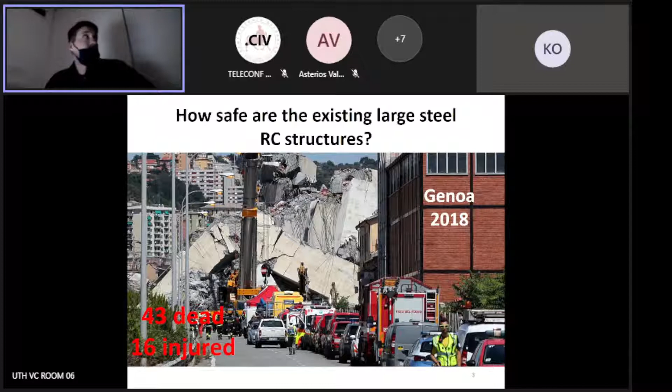So this is a message really to our generation of engineers and future generations, that this is a problem that sooner or later will start coming out, and we will see this, hopefully not with such catastrophic consequences, but this is an indication that we need to strengthen the existing reinforced concrete structures sooner or later, or build new structures using materials which have higher durability and longevity, allowing for more durable design. And this is where FRP composites come into play. What are exactly fiber reinforced polymers?

I have some samples here that I will circulate now, which actually imitate the fiber reinforced polymers, you can pass them around. You see, they are similar to reinforcement that we are using in conventional reinforced structures. They are in the form of bars, laminates, made of different fibers embedded in matrix, as well as shear links, which are used in the shearing process. You can circulate it for everyone, and show them at the camera.

And this is something for the online audience. So these are the FRP, glass FRP bars that we are using as reinforcement. Of course, this is just a small sample, a very short one. These are GFRP, glass fiber reinforced shear links that we can use as shear reinforcement. These are some different GFRP bars that can also be used as internal reinforcement. As you see, they have different structure because of different processing of the bar, which allows for better bond.

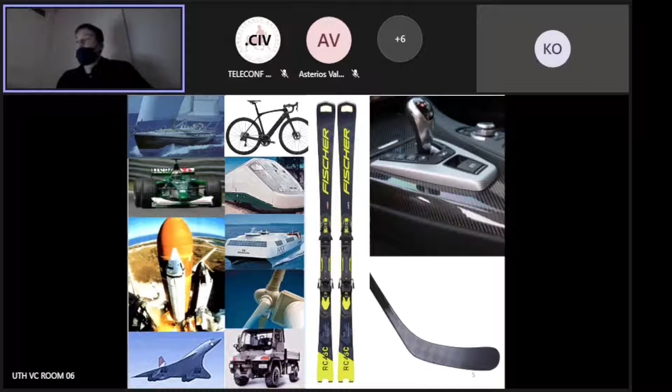This allows us to design structures more sustainably. So what are FRPs? You can see them basically every day. They're actually a legacy of the space industry, which was very active in the 60s, then moved to transport, aviation, and even sport equipment. Wherever we need lightweight, durable, flexible materials, we can use composites.

The fiber reinforced polymers, this is how they're called. Composites are made of 3 essential parts, mostly 2 with some additives optionally. They contain fibers - they can be glass, carbon, basalt, and aramid. As you see, they have different colors in the samples I showed you. Glass and aramid fibers are kind of yellowish. Basalt and carbon fibers are darker, usually black.

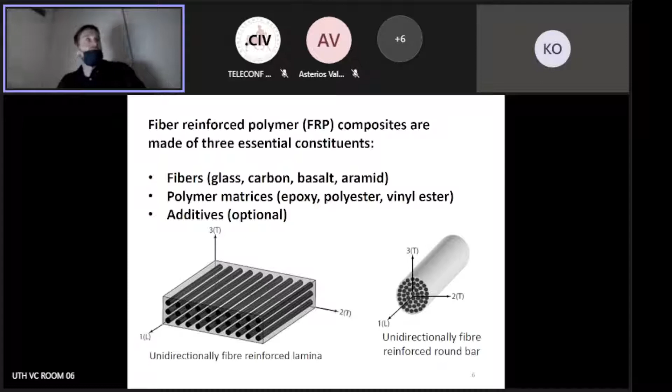The fibers are responsible for carrying the loads, where the polymer matrices are responsible for providing composite action between the fibers, as well as giving the final shape of the composite. We can also add some additives optionally, like plasticizers, bonding, and chemical agents, which allow the matrix to achieve better properties.

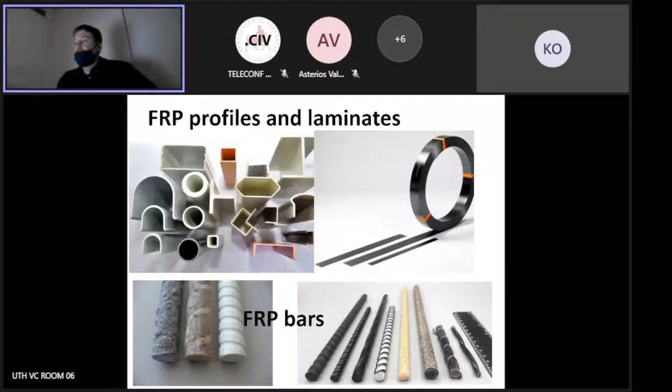As such, we can see FRP profiles in forms like hollow sections or closed sections, open sections, as well as laminates or bars if we want to use them as internal reinforcement. Here we have some possible uses of laminates - as you see on the top photo, we can glue the laminates directly to the concrete surface and strengthen deteriorated reinforced concrete structures. But we can also use it as internal FRP reinforcement and make structures fully reinforced with FRP composites, which highly increases the durability of the structures.

Now, the size of the photos is also intentional. Right now, the biggest application of composites is in strengthening existing structures. The market for new structures fully reinforced with internal reinforcement is growing, but it's still smaller than the market for strengthening. One reason is that we really don't understand how to design safely large FRP reinforced concrete structures. We've adopted some provisions from steel codes, but researchers and practitioners are still a little hesitant.

But this market grows - I recently had a meeting in one of the technical committees of FIB, which deals with FRPs in the field of strengthening as well as internal reinforcement. Some experts from the United States clearly indicated that the market for internal reinforcement is increasing now. Even recently, for every 10 projects with FRPs, 7 or 8 out of 10 was actually with internal reinforcement. So we can see this market is growing, and it can even grow more in the next decades.

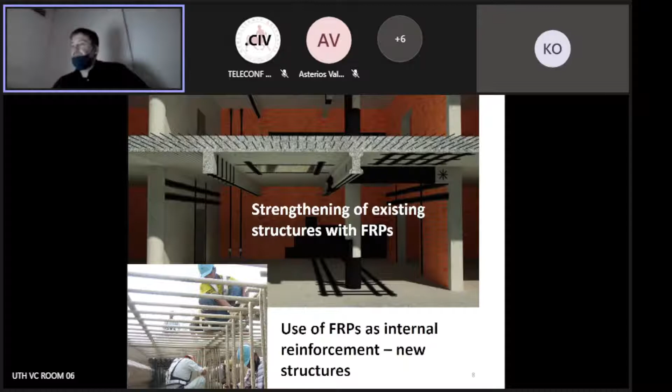So these are some typical properties for FRP composites. As you see, we have different fiber types, and different properties can be observed. The variability in tensile strength and Young's modulus is quite high. We can get something from 2,700 MPa in terms of tensile strength up to even 4,000. So if you remember how much structural steel can take, you can see that you can achieve tensile strength even up to 7-8 times that of structural steel.

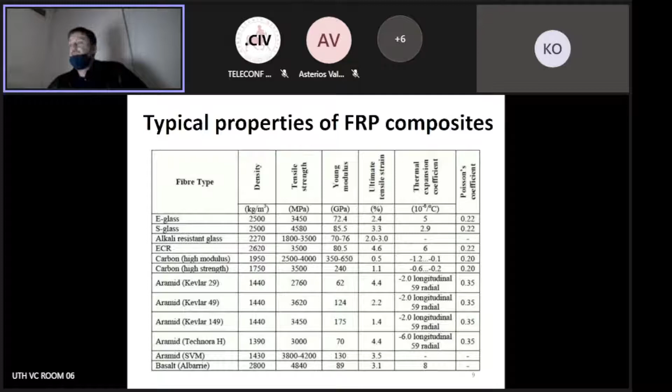The same with modulus - we can go much higher even with the modulus, although this is only for some limited applications using carbon fibers, which are very expensive. Right now it doesn't really make sense to use such expensive materials, so we rather focus on the use of glass and basalt fibers, which are quite a good deal in terms of stiffness of the reinforcement to price.

So what's the difference between steel reinforced concrete and FRP reinforced concrete? The main difference is that the stress-strain behavior of the fibers is linear up to failure. So we don't have this nice yielding plateau that we can observe in steel reinforced concrete structures, which, as you will see later, is kind of complicated because we need to find a limitation for that reinforcement which will allow us to safely design such reinforced structures.

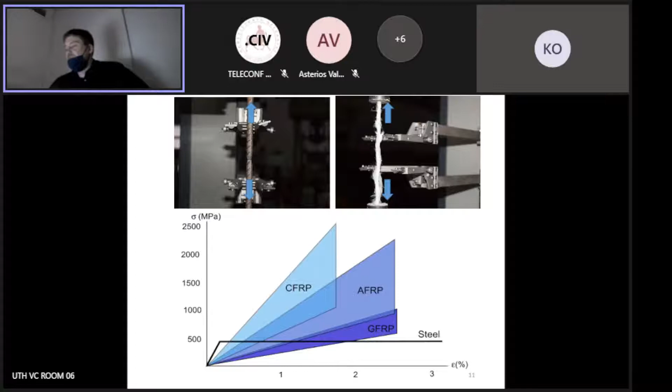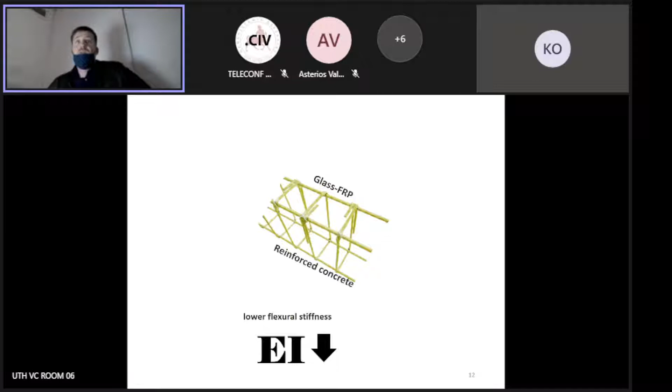So if we take a fully reinforced glass FRP reinforced concrete beam, what are the differences? Basically, because glass fiber reinforced FRPs have lower flexural stiffness of the bars, we will observe lower flexural stiffness, larger strains, larger deflections in the beams, wider crack openings, as well as less concrete will be engaged in compression. So actually, you will see that all these mechanisms which contribute to shear in concrete are kind of smaller.

The contribution is smaller. And also because the fibers are only placed in one direction, the transverse stiffness of the bars will be much lower.

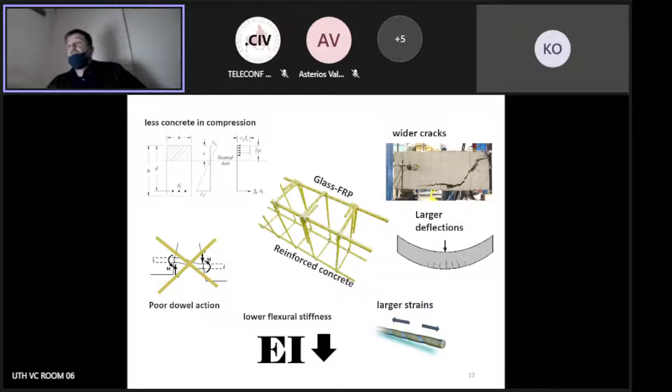So we see that this would result in a situation like this. If we test two identical beams, identical geometry, with the same amount of reinforcement—one steel, one glass reinforcement—because glass has a lower modulus, we will see that the FRP reinforced concrete beam will be more deformed, more cracked, will exhibit more brittle behavior, and lower load capacity.

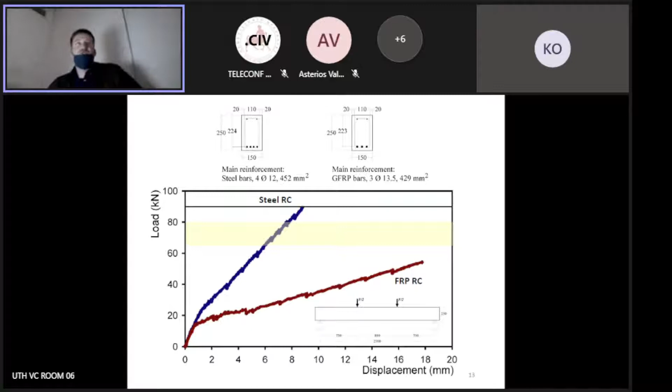So now you might ask, what's so special about FRPs if they yield smaller capacity than regular steel? Well, as I said, I'm not trying to convince you that this is cutting-edge technology and we should stop using steel and start using FRPs. I'm not any sort of FRP crusader going around selling FRPs.

I'm just telling you that this is something for something—a choice that we make to construct new structures with materials that can live longer because of the non-corrosive behavior of this reinforcement. This reinforcement does not corrode, so we can technically design structures for much longer than we would with steel. The pros of FRPs are, as you saw, high tensile strength, high deformability, non-corrosive characteristics.

As well it is a lightweight material, so it's easy to ship to the construction site as well as handle on site, which provides an opportunity to cut some costs.

However, usually because of the price of FRPs—carbon fiber reinforced polymers—we are forced to use lower stiffness bars. So we actually end up stacking more FRP reinforcement in the sections to achieve the same capacity. Another issue is poor transverse stiffness, which limits us to using FRPs only in one direction, and they have poor performance as dowels, whereas steel performs well in any direction because it's an isotropic material.

The most important thing for me is that it has no yielding plateau, which really changes the whole concept of design. Although for now we are still using the same design concept as for steel, I will show you a bit more later, and you will realize there is scope for some improvements there as well.

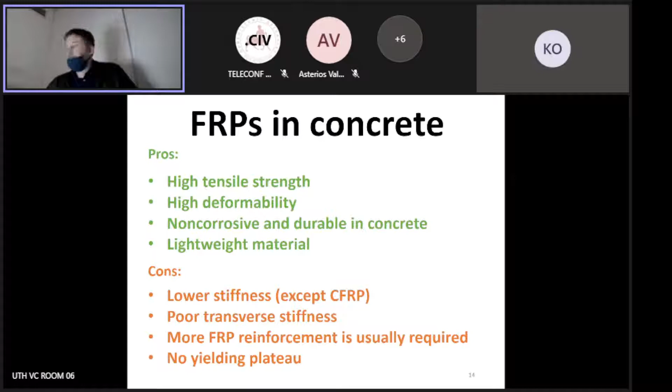So let's move to design philosophy for shear. I will start with this video just to show you how brutal shear can be.

I'm sure most are familiar with how structures fail prior to flexure failure if under-designed for shear. This is one of the beams that I tested in Sheffield. It has a depth of around 400 millimeters, with no shear reinforcement at all—only some reinforcement here just to make sure it fails here. So, as you see, this is some kind of failure that you really don't want to see at any ultimate limit state, because it is just catastrophic.

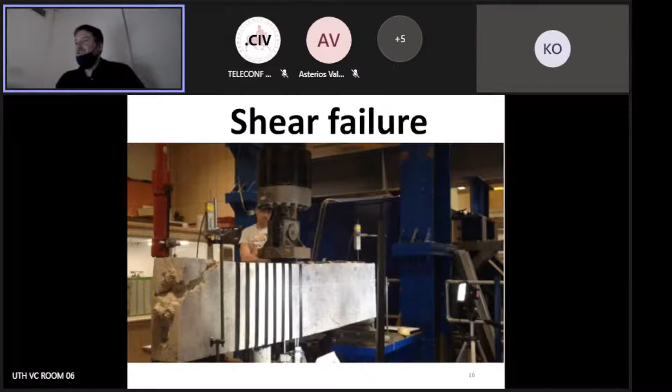So what do we really do in steel reinforced concrete? If you know Eurocode a little bit, you know it is so scared of shear, or wants to be so conservative, that it doesn't even take into account the contribution of concrete. Although the overall shear resistance comes from the contribution of concrete and the contribution of shear reinforcement, in Eurocode, once shear reinforcement is provided, we don't even care about the concrete anymore—we just make it a very conservative design.

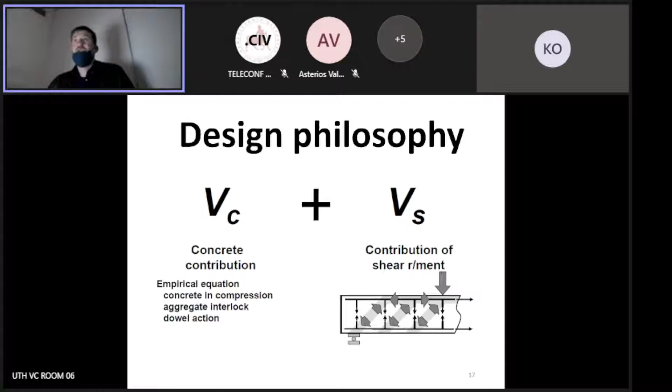Because, as you saw, all these mechanisms in FRP reinforced elements are deteriorated—FRPs are more brittle, and these mechanisms have smaller significance in terms of overall shear strength—we are not allowed to be so conservative in FRP design. We need to take into account both VC and VS, because otherwise we would end up with a very small contribution, and it would not make sense to use these materials.

So how do we deal with this? What do we do when we design FRP reinforced concrete elements? This question arose at the beginning of the 90s when we started looking at this. Really, the most reasonable way was to limit the strains in the FRP reinforcements—both longitudinal and shear reinforcement—to the same limits we use for steel.

As you know, steel yields at around 0.2 to 0.25%. So the first idea was to assume we are forcing our beam to the same strain, and then the same mechanisms should be mobilized. After a while, we realized we could push it a bit farther and still nothing bad happens, so we can even go to 0.45%, and it was claimed that this is a safe design, and nothing can go wrong with this.

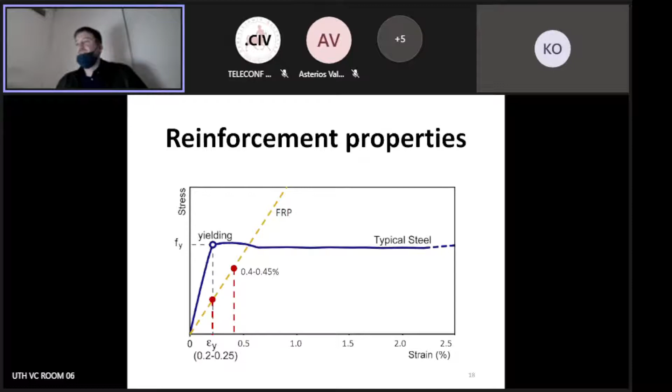And this is to some extent true, but I will show you what I found in my research, that actually this is not really a conservative approach, and in some cases for larger elements we can have some issues with this.

So what we do really is the strain approach. We say that strain in FRPs is the same as strain in steel, and the forces to be developed are also the same. So as such, we end up with the equivalent area of the reinforcement that we need to provide.

If you remember the Eurocode equation for calculation of contribution of VC, it looks like this. We basically calculate a new area of the reinforcement, and this is how we really account for contribution of concrete in FRP reinforced concrete elements.

There's a kind of very simplified approach that is directly adopted from the Eurocode. This is the Eurocode modification, by the way. Every country, every different continent has their own codes, and they also put their own modifications. We're not gonna go that deep here, we'll just focus on Eurocode because we are all familiar with this code.

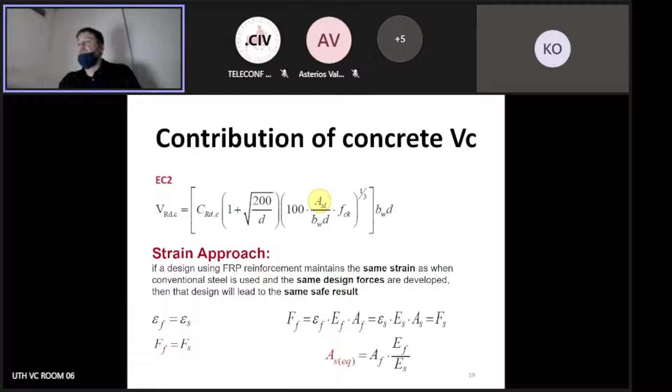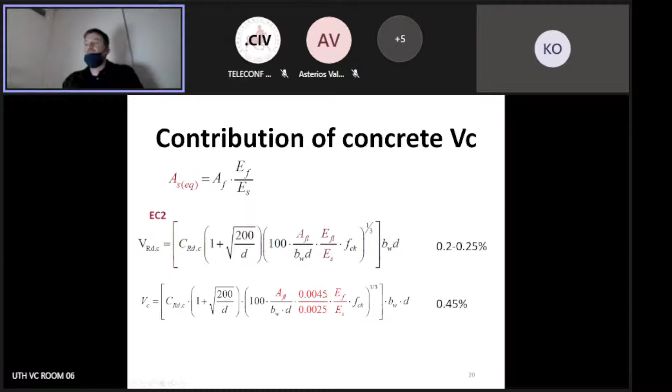And this is another analytical explanation of how they deal with this. If we want to increase the contribution up to 0.45%, then of course we need to apply a factor which will account for that. So this is for VC.

How do we deal with VF, which is the contribution of the shear reinforcement? Well, since we are operating with stresses here, it's pretty easy. We can just put those limits that we are interested in directly into the equation for truss analogy, and we can basically calculate the contribution of the shear reinforcement in this way.

As for now, I don't know, maybe it has changed in the last few years, but 4 years ago, the limit for the contribution of the shear links, these shear links that I circulated with you in the design, was from 0.25% to 0.5%. This is the maximum that we can do, depending. Canadians are less conservative and allow for higher utilization. Japanese code, if I remember correctly, and British code were more conservative.

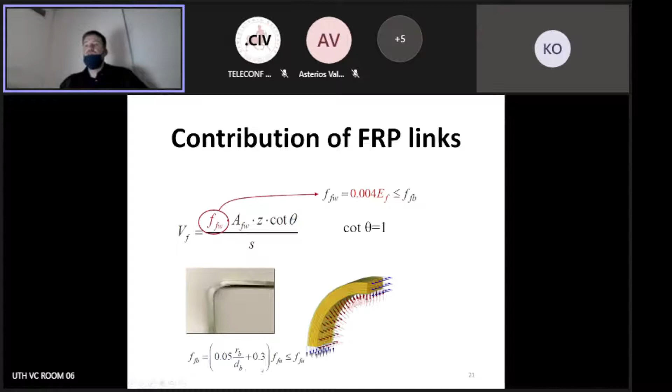Of course, we have to remember there is one issue with the FRP shear links. As I said, the transverse stiffness is much lower than the longitudinal stiffness along the fibers, so there is a risk of premature failure in the corners adjacent to the longitudinal reinforcement. We need to account for that and reduce the stress to an allowable stress in the shear links using this equation.

So what else is important in shear? This is something that I was studying, and it's really quite a complicated topic. It has been identified since the 60s already, but I believe this is one of the reasons why we still hesitate with using FRP reinforcement for large reinforced concrete structures, because we really don't understand how this really works.

Size effect in shear in reinforced concrete - what does it mean? It means that somebody observed a long time ago that if we design and test a few identical beams where the only variable parameter is effective depth, we actually will observe lower shear strength at failure in the larger elements. This is more pronounced for elements with a/d around 2.5, so shear critical. Once the element becomes more slender and resists loads more through bending than shear, this effect is less significant.

This is a problem, because if we use the same equation without this reduction factor, we will end up predicting a continuous, the same shear stress level across the span of depth, and this will end up with large reinforced concrete members being grossly under-designed, which can cause a failure of the structure. Actually, there was one shear failure of a warehouse - I don't remember exactly when, but it was related to size effect. Since then, we started looking into this in more detail.

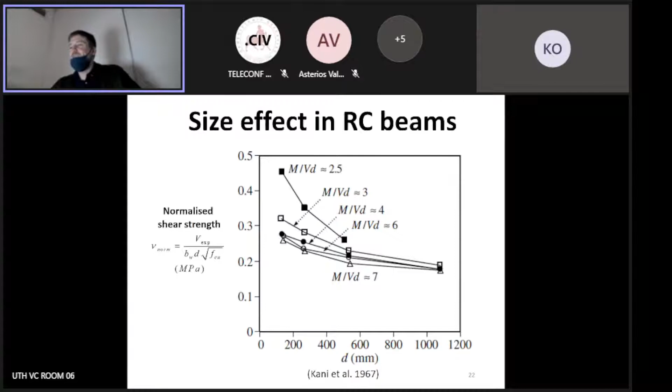We just apply some reduction factors, which tell you how little we really know about the size effect. Every code has different factors that are all over the place - some give bigger reduction in shear strength, some give smaller reduction.

These are all the reduction factors applied in FRP codes for internal reinforcement, but they're really directly applied from steel reinforced concrete design codes, which I don't think is correct, and I think many people have started thinking this is something that could be improved.

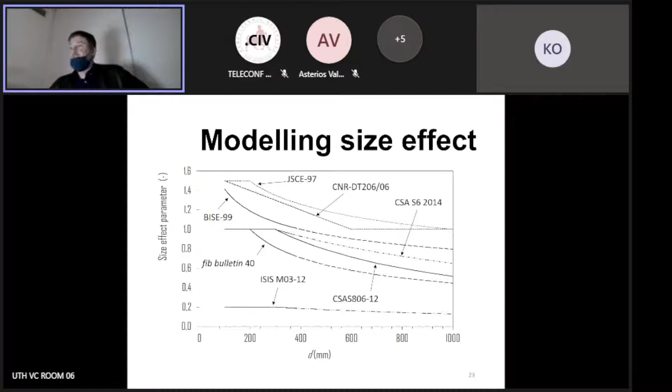So in my research, I was really looking into these two topics: one was size effect in FRP reinforced concrete elements, and the second was the relative contributions of Vc and Vf - contribution of concrete and shear reinforcement to the overall strength of the beams.

We have a collection of two large data sets of probably all beams that have ever been tested in shear. There is a famous database by Reineck et al., and they really collected everything that has been done since the 70s - a huge paper which many researchers work on.

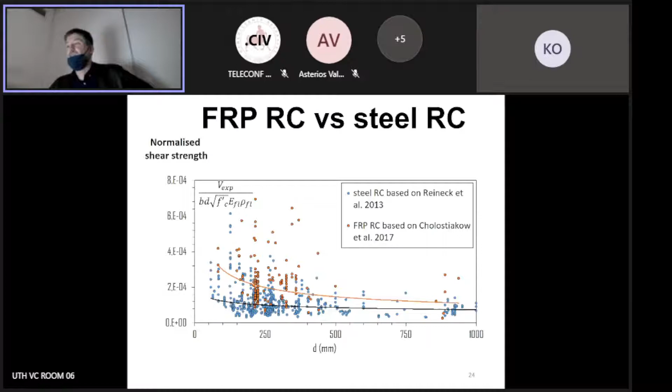When I compared this to my database that I collected for FRP reinforced concrete elements, which is of course much smaller, I started seeing indications that it makes sense to argue these reduction factors directly adapted from reinforced concrete design codes might not be correct, because it looks more pronounced.

When I checked the performance of some code equations for FRP reinforced concrete elements and plotted experimental results against predictions, in an ideal world we wanted to see them along this line where we see 1. Of course shear has a lot of variability, so we really don't see that here.

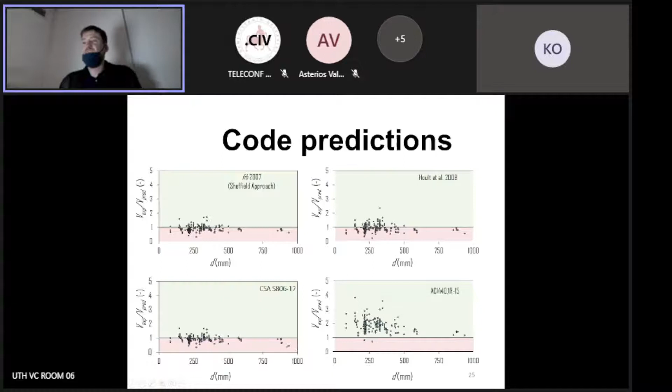So I designed and carried out a series of tests on beams, looking at different sizes of the elements, with beams with and without shear reinforcement. I was focusing really on size effect and on the contribution of the FRP reinforcement.

We were lucky to be able to use digital image correlation for this - it's a measuring tool which allows you to obtain full field information on every surface you are investigating, so we can really measure the displacement of any point on the beam.

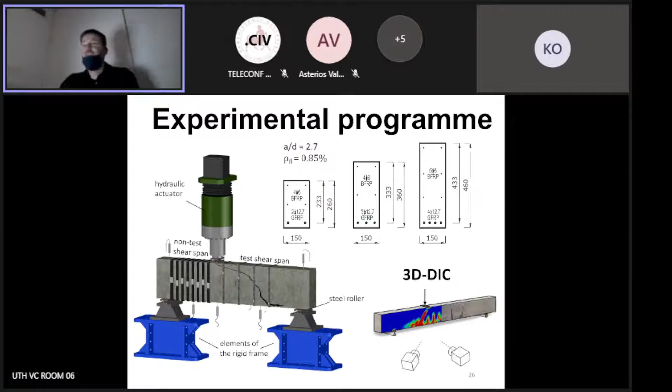Now, of course, I was dealing with internal reinforcement, which you cannot observe with DIC because internal reinforcement is by definition inside. So we had to do a little trick and use externally bonded, fully wrapped FRP links, which one might argue are not really internal reinforcement. But if you know shear, the performance of this type of reinforcement is strength dependent, not bond dependent, and they essentially work similar to internal reinforcement.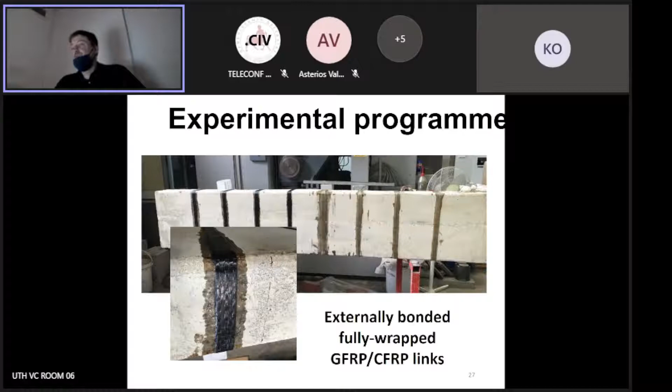So we adapted this way, and what we could do is get better insights into the strain and utilization of the links. As you see, these dark spots are also strain gauges that I put, but the problem with strain gauges is that they give very local information about the utilization of the material they're put on - if the crack goes a little bit up, they might show you nothing.

So anyways, we had both strain gauges and DIC, and we were monitoring the utilization of the links this way. I want to show you this.

This is a test on an FRP glass reinforced beam. Actually, Lambros, I think you were there in Sheffield when we were testing - I think so. So we see it pattern failing, one by one link fails, and you can see that it's quite brittle.

What I was doing was repairing one side and testing the other span of the beam, which can really provide you two specimens from one if you do it properly. And actually, I got quite good results from this.

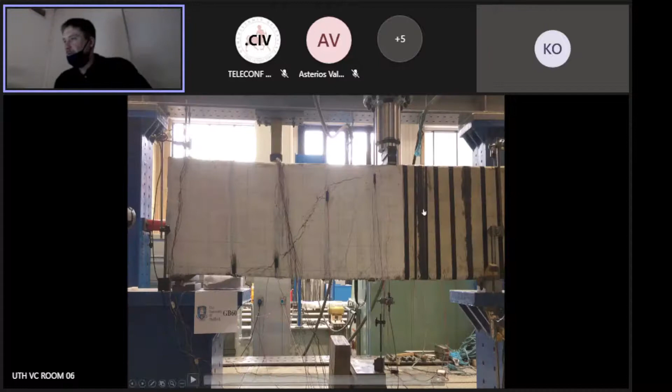There was another video to show you - this one is carbon stirrups. These carbon stirrups are stronger, let's say that, so we can expect a larger break.

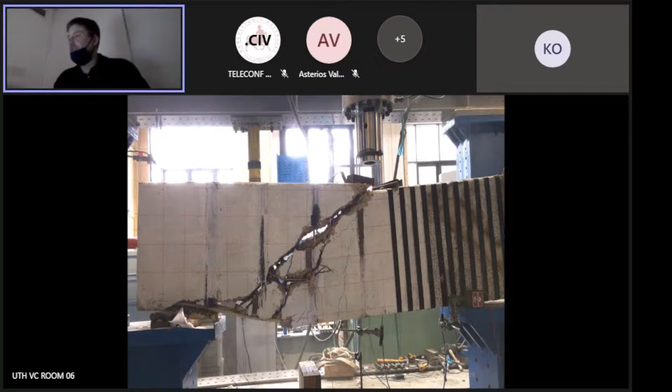So you cannot say that FRP reinforced concrete structures are not brittle after these videos, I suppose. These are some cracking patterns from the tests, but what was very interesting...

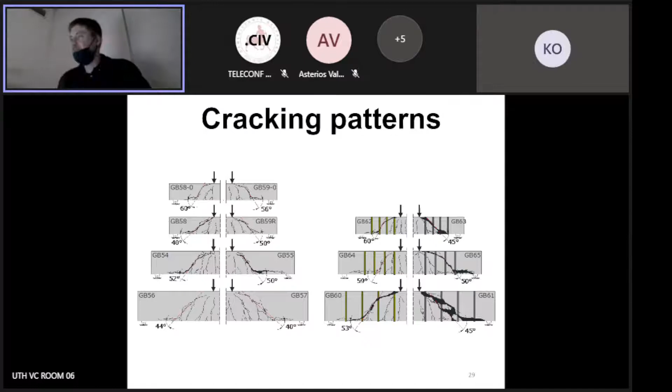What we observed is that the initiation of the shear crack always starts from the tip of the flexure crack, then goes up to the compression zone, and when it cannot go further, it goes backwards and propagates along the horizontal reinforcement.

What I found is that this initiation point is actually a function of the overall or effective depth of the element. The taller the element, the lower this initiation point was placed, which really affected the inclination of that shear crack.

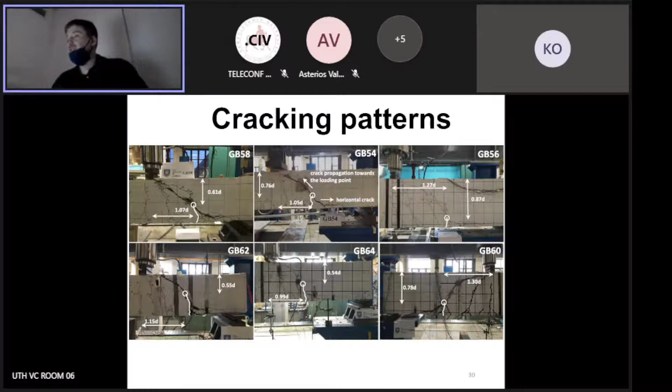And these are some test results, from the longitudinal reinforcement strain. And this is the first indication that I realized that something is not really according to the literature that I was studying.

I said before that up to 0.45%, or 4,500 microstrains, nothing should happen to the beams. But the tallest beams, which are not really frequently tested in labs, showed that you can get a little bit below that 4,500.

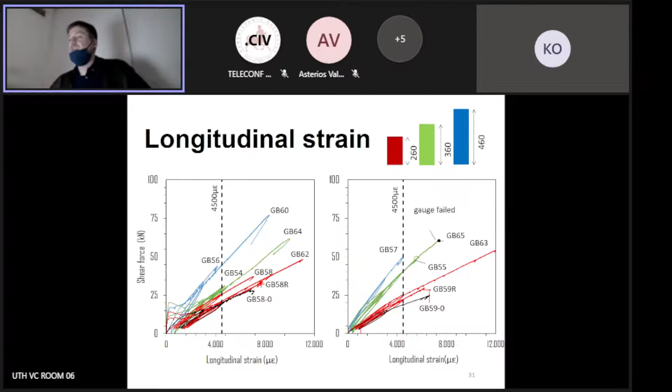And if you test even larger elements, what I found out later, you can get even lower strains. So that already gave me an indication that there is something not consistent with the current state of the art at that time I was studying.

If you provide shear reinforcement, according to the literature, you should not see size effect because it's effectively mitigated. And I saw that too.

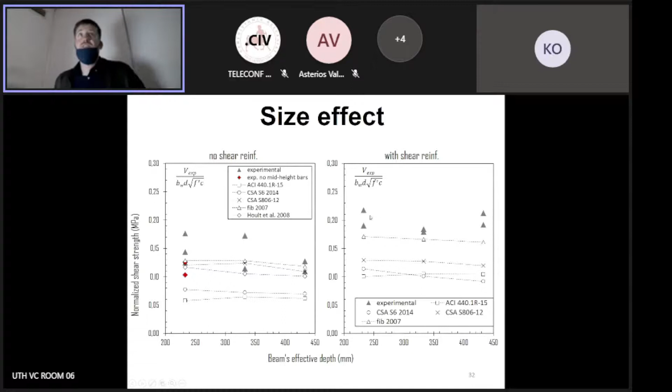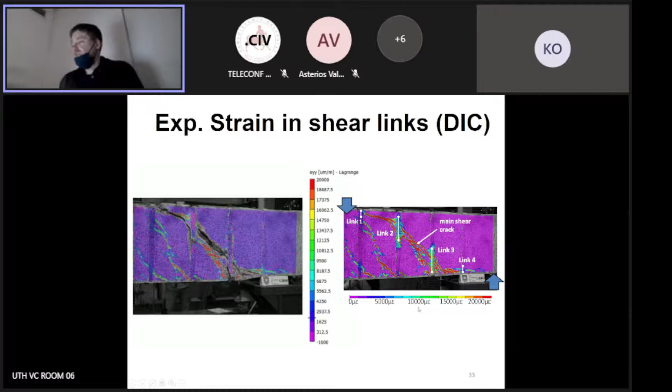Then I calculated the shear force produced in every one of the links and subtracted it from the total. So at the end, I had the contribution of the shear reinforcement, and everything else was the contribution of the concrete.

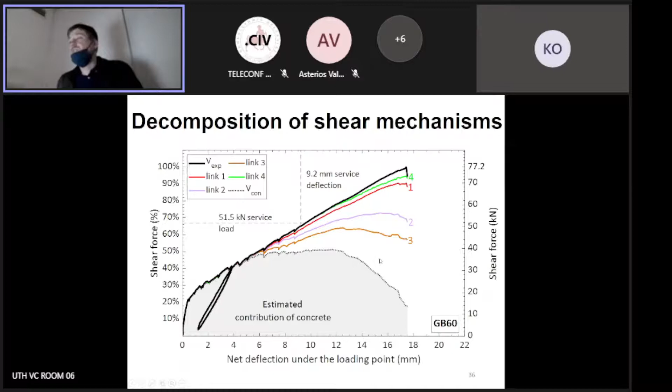So although size effects should not really exist in elements with shear reinforcement, you can see that size-related phenomena are clearly present here, which was very interesting.

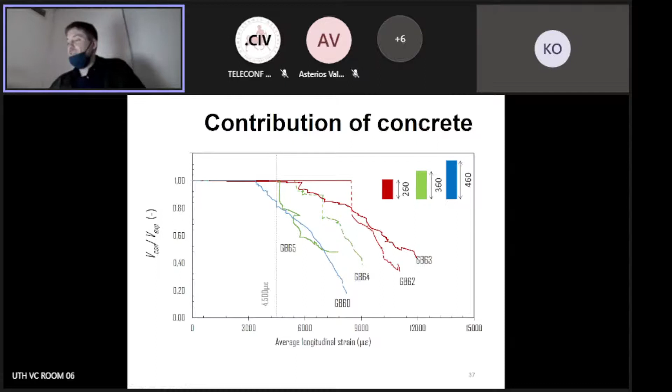So here we have a set of data where the red triangles are my data from my PhD. I dug a little deeper and also found other research studies testing larger elements, then excluded all the elements which were too slender or too much like corbels.

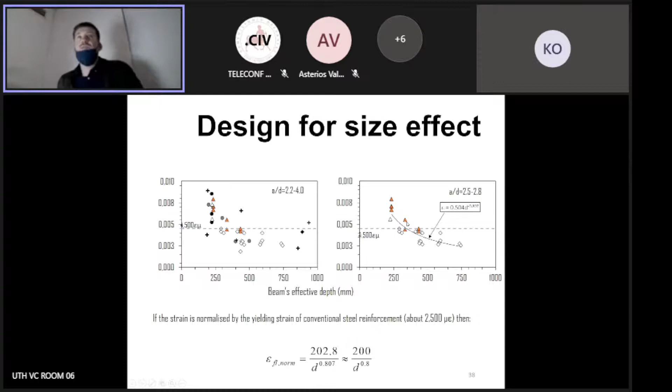I really saw a quite clear trend that the maximum strain in the longitudinal reinforcement should not be a fixed value, but is really a function of the effective depth of the beam. When I worked on it a little more, it showed that it can be easily applied as an additional reduction factor to the already existing reduction factor for steel reinforcement.

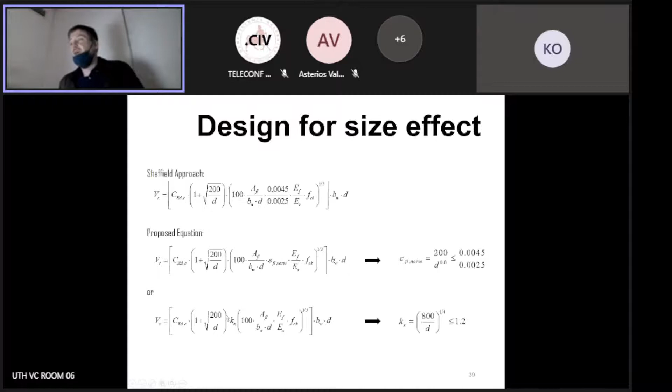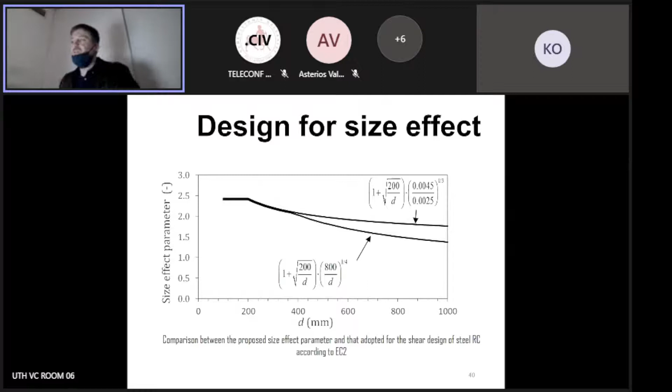This can help fix those problems I showed you at the beginning. Basically, the one on top was already in the literature, placed in FIB Bulletin 40 as a provision for VC, the contribution of concrete. I made it a little more pronounced to get these data points shifted up a bit, and applying that provision really helped give those predictions more accurately.

Now you might say, okay, all this work for only shifting up a few data points. Yeah, that's maybe true, but we don't have that much data. It's not easy to go to the lab and test a beam that's 800 millimeters in size. It's a lot of work.

But the most interesting thing I found in my research is that I used the same equation for a steel reinforced database. What I observed, for some reason, is that it can be directly applied to these steel reinforced concrete structures, and as you can see, it can reduce the coefficient of variation by up to 25%.

This is a huge improvement over the existing code, because if this is the performance of the existing Eurocode equation, it should make the data points align along the line—it clearly doesn't. You can see the same size effect I showed at the beginning of this presentation. If you use the equations we developed at the University of Sheffield, you can bring this down and make the design more economic and robust.

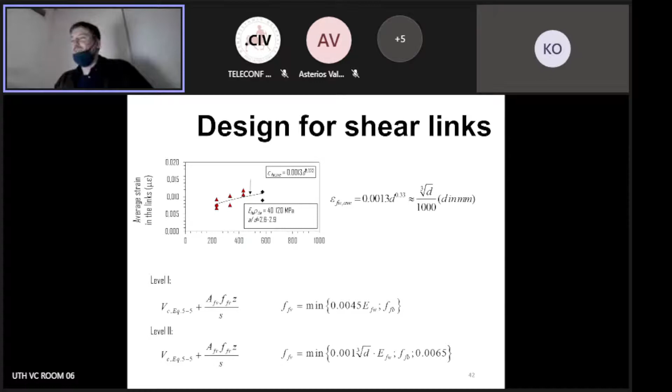Okay, how much time do we have? Ten minutes left. I'll skip this other model I did here—it's just for the shear reinforcement. It's more a fun fact than a real model. There's obviously not enough data to support it.

But I think where to go further with this topic is to start looking into the real contribution of the concrete. As we saw, the contribution of concrete after cracking decreases and the contribution of shear reinforcement increases. What we do now is a level 1 approximation, taking constant contribution of concrete after cracking and constant contribution of reinforcement, based on a fixed angle of 45 degrees.

Does this produce an unsafe design? Not really—for some reason it's pretty accurate. It's not very accurate, but it's conservative and reasonably accurate. But we really don't predict what we're claiming to. The VC we're calculating isn't really the real VC, and the VF, the contribution of shear links, isn't really that one either.

To be more accurate, we should move toward level 2, which I didn't discuss because I skipped it, but actually the most accurate approach would be to operate with the variable truss angle and reduce the contribution of concrete failure accurately, to get a very robust and economic design in FRP reinforced concrete structures.

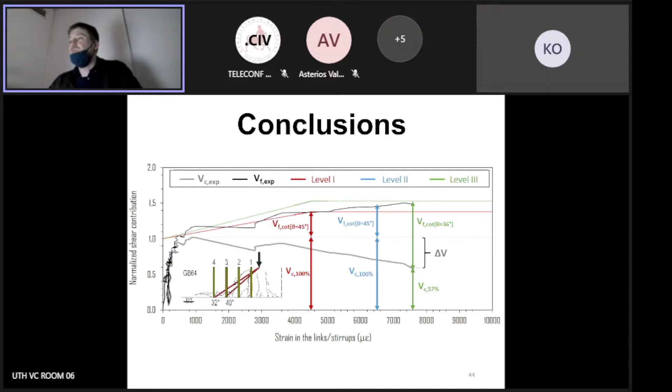This is just another graphical explanation of the situation, which I can skip now. And basically, that's it that I wanted to cover today.

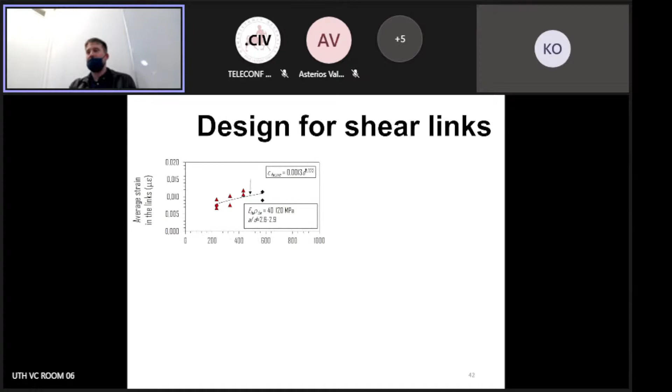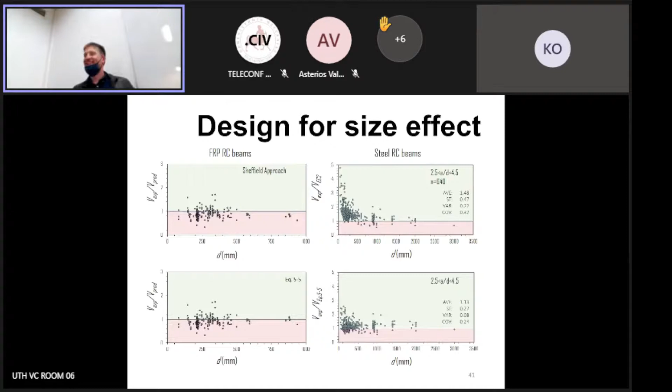You have a question on YouTube. Just give me a minute to go and check it. It was on YouTube. We are popular. I don't see it.

Are there any questions from Teams, from MS Teams? Would you like to raise your hand?

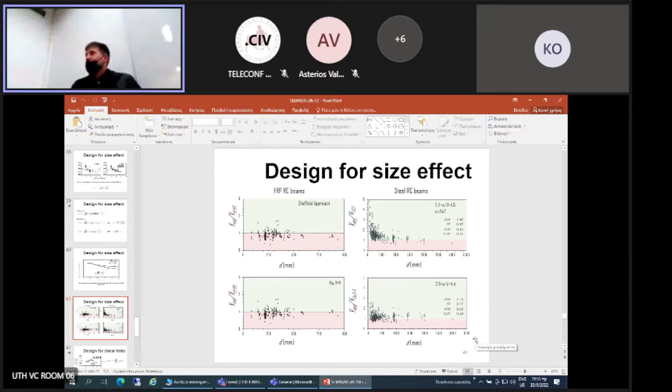What is the benefit of using a material which is not as ductile as steel? We're talking about brittle material, right? We're talking about internal reinforcement. For reinforced concrete, when you use steel, the main benefit is the ductility. And we are introducing now a brittle material to work together with another brittle material.

I'm not trying to say that this is the next direction of the research. The biggest benefit of FRPs inside the concrete is definitely the anti-corrosive properties we can achieve. So we can design not like Eurocode says for 50 or 100 years, but maybe 500 or 1,000 years. Why not, if it's well maintained. This is a field that has been progressing, not a new field, but quite slowly when I started working on it, and even earlier. Now I see the pace increasing. It's a matter of more research, improving even the ductility of these fibers, to introduce this into the market at a faster uptake.

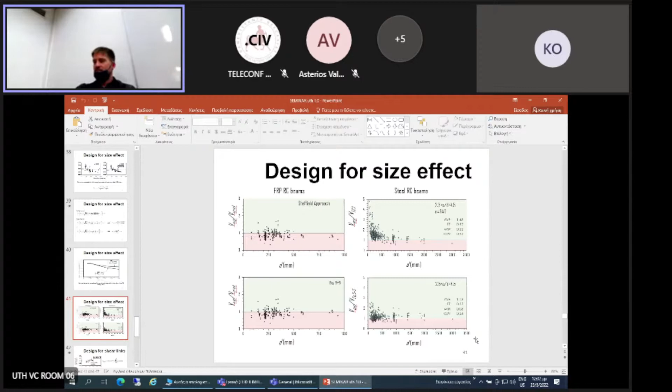Okay, I have a question from YouTube. It says: what design code do you use for the design of FRP cross-section in slide 13? In slide 13, what design code do we use for the design of FRP cross-section? I don't know, but slide 13? Slide 13 of the presentation. I don't remember, to be honest.

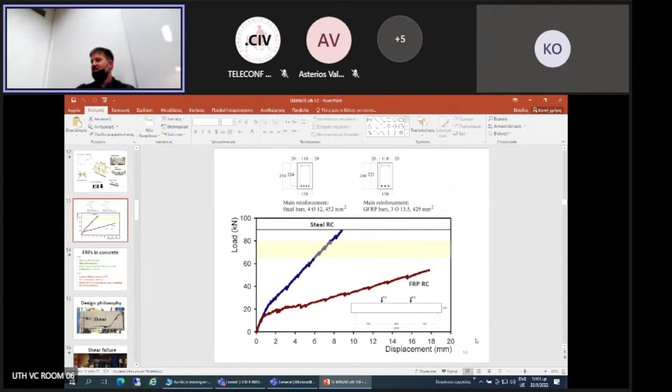Okay, it's honest. This is from some research of my colleagues, most probably using the Eurocode equation modified to calculate. But in slide 13, there are no calculations here. Yeah, I don't know, maybe this is just data that is plotted. There is a misconception there. In general, I can tell you what kind of codes you can use for design in shear.